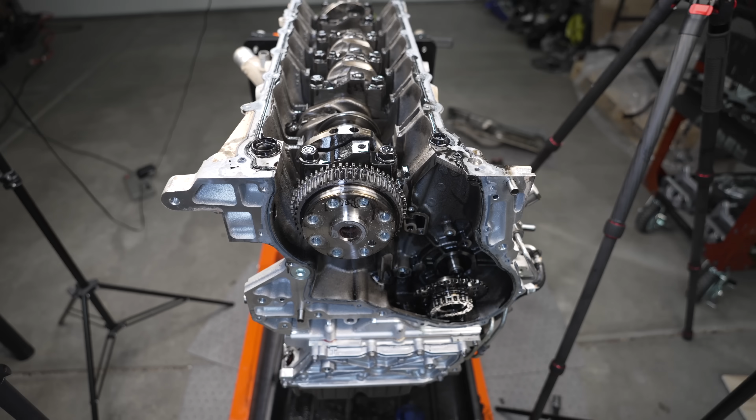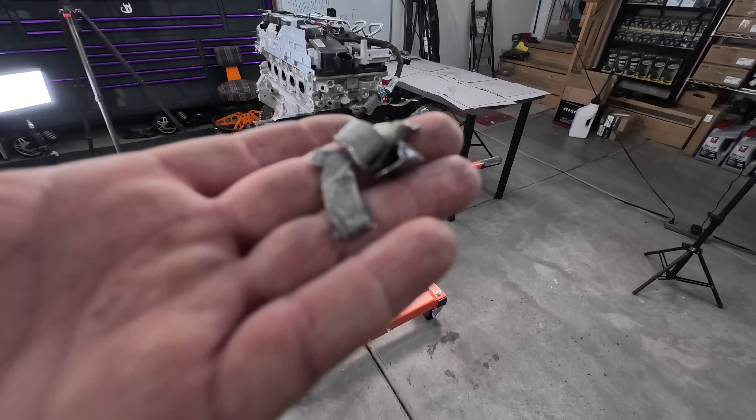Looks like we have it figured out. The LZ0 thrust bearing failure is answered. Thrust bearing failed in this LZ0 engine just over 7,500 miles. Normally when they fail, we have bearings that look like this and they're in the engine oil pan. This one was still running. We had low oil pressure. The replacement was needed because of the crankshaft end play.

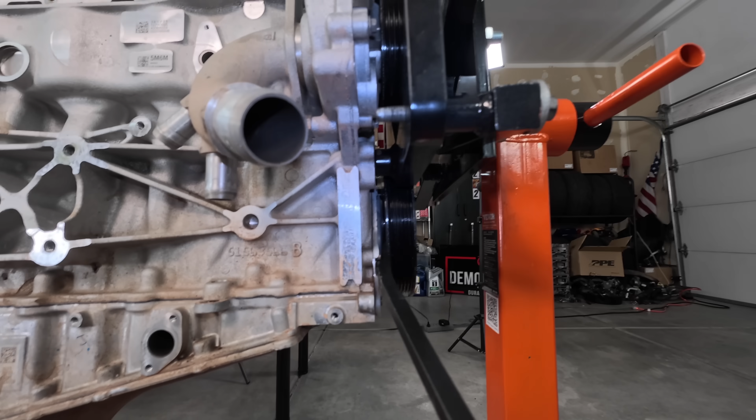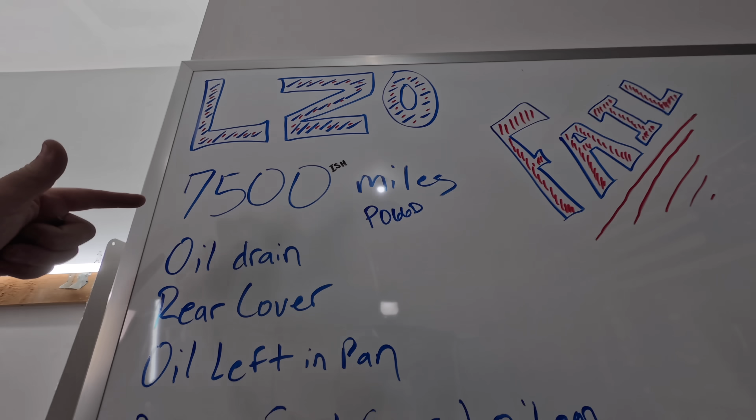Now that's a lot, but the good thing is this engine was running, which means that these bearings should not be in the engine oil pan, or there should only be one because, like I said, it was running. So here's our plan. With 7,500-ish miles on this engine, we're going to drain the oil, which we already did. The rear cover is going to be removed. We're going to go ahead and peek inside the engine oil that is left inside the oil pan because it's quite amazing how much is left in there.

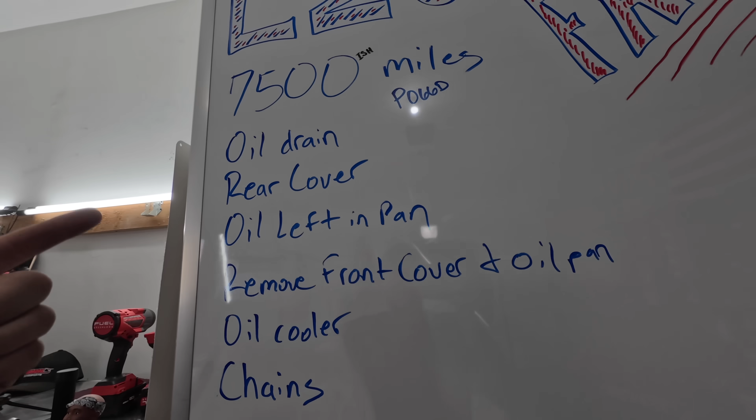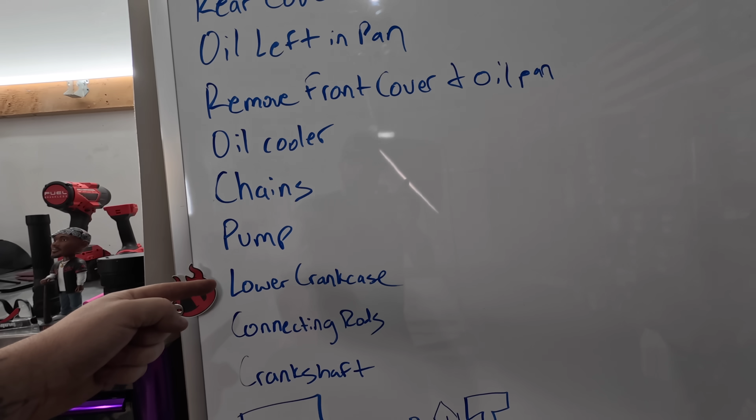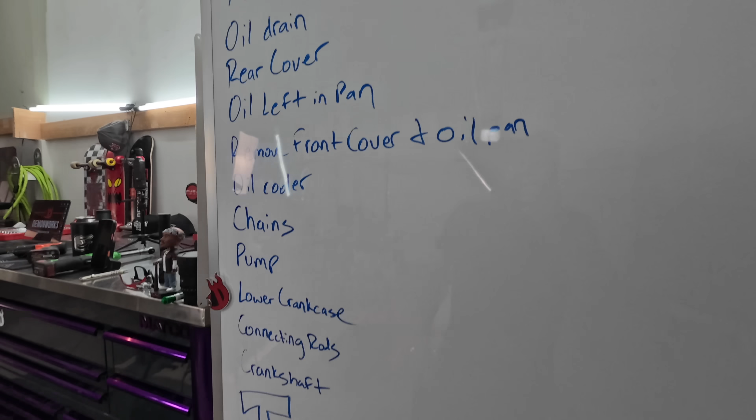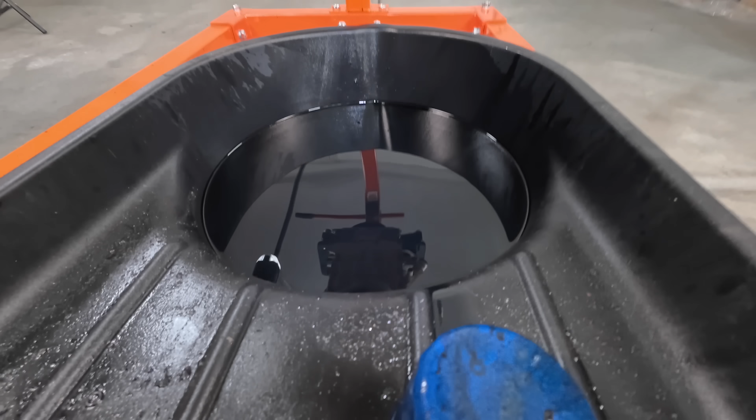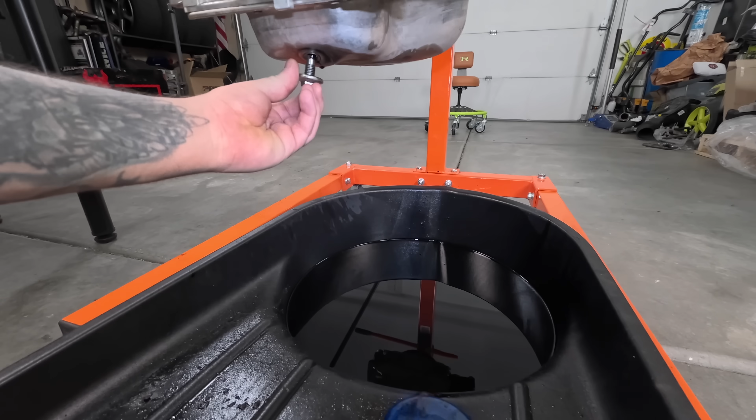I already drained the engine oil from this. There was quite a bit in there, so it definitely was not an oil consumption problem. There was no heavy sparkling or anything of the nature inside there, so we don't have a whole lot of metal debris, which is awesome because that means that this is going to be mostly intact. I'm going to put this drain plug back in. That way we can see just how much oil is left after an engine oil change.

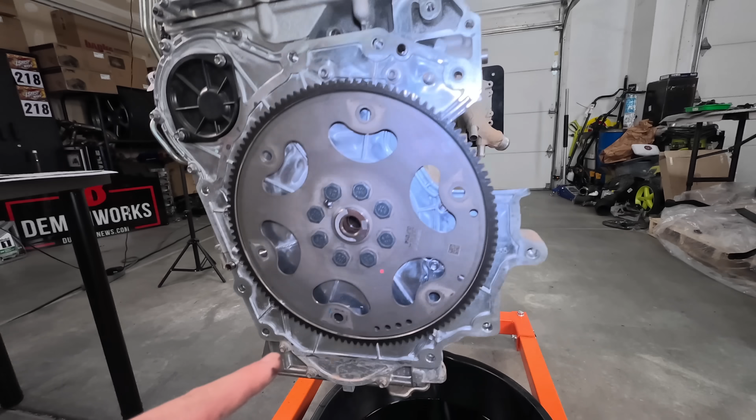And you can see the slope of the oil pan is correct. The engine is sitting level for the most part. So this is going to indicate exactly how much oil is left in there after an oil change, which is an ongoing debate online. So they did revise the engine oil pan, put the drain plug right here, and I do have a video on that.

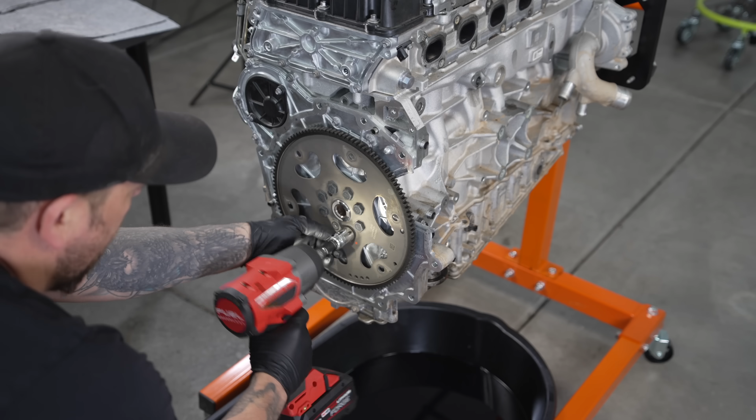With the rear cover off, we can now see the engine oil pump belt, which is the big controversy. Here it is. There's our 2026 belt. This is the one that's being used. Same as the one that was used in 2020. Here's the amount of play that we have in there. It's really not a problem. I think it's all blown out of proportion.

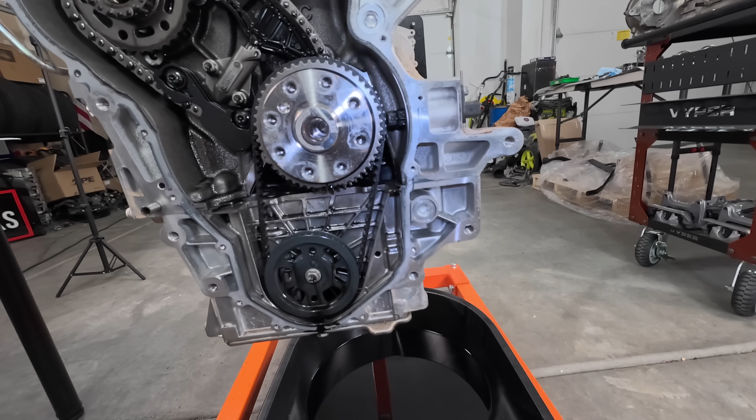But what we're going to do is remove this belt and pulley. Then we're going to be able to look inside there, I hope, and see how much oil is left in that pan. All right, let's get in there. See how much engine oil is left in that pan, which actually is a little bit more difficult to see than I expected. So let's go ahead and remove the pan. What I'll do for you is remove the pan like this, so that way we can see how much is left inside there after an oil change.

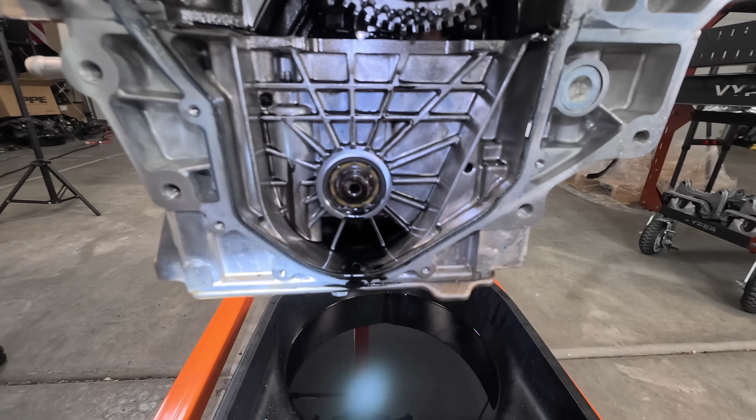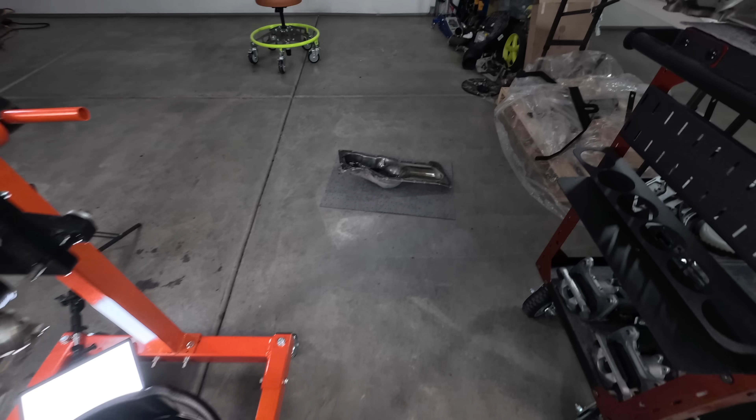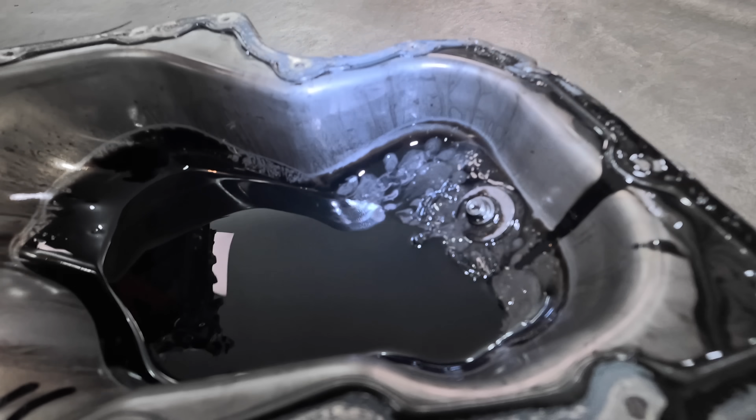Here we go. Here's the engine oil pan as just removed. We don't have a lot of debris right there. Look at how much oil is left in. This is how much is left in there after an oil change. There's a lot of old nasty oil that gets left in there. The newer pan has a better design, but that's what comes on the new replacement engines and also the 26s.

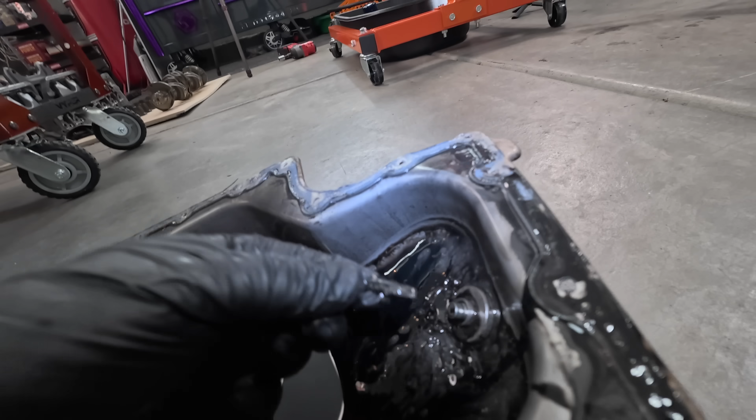But you see this? That's a thrust bearing. So it looks like we do have one thrust bearing that came apart at least. We have more. That looks like threads. All right, so that's interesting. We got more. Those are threads. Is that a bolt? This should be interesting. A lot of metal debris in here.

Here's the rest of that thrust bearing. So we have one that came apart. That is some thick, sludgy goo nastiness right there. There we go. Let's tear into this thing and see what failed.

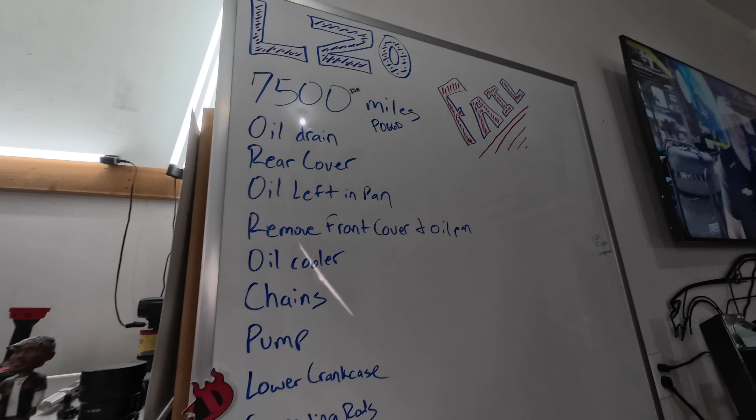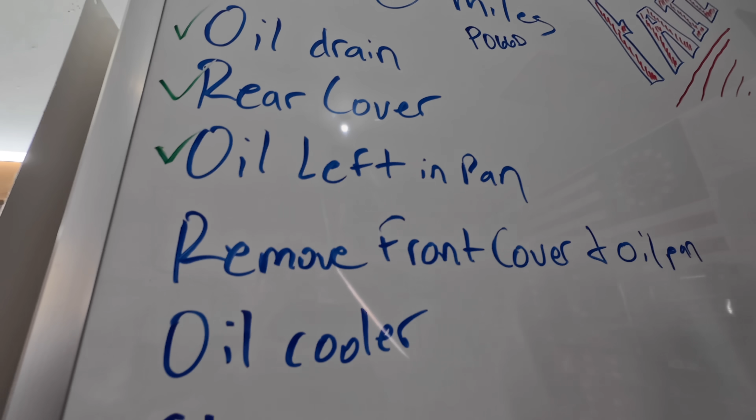It's time for a check-in. We got our oil drain taken care of. The rear cover is off. Oil left in the pan, we showed that. Remove the front cover and the oil pan. We need to remove the front cover, and then we're going to flip this over.

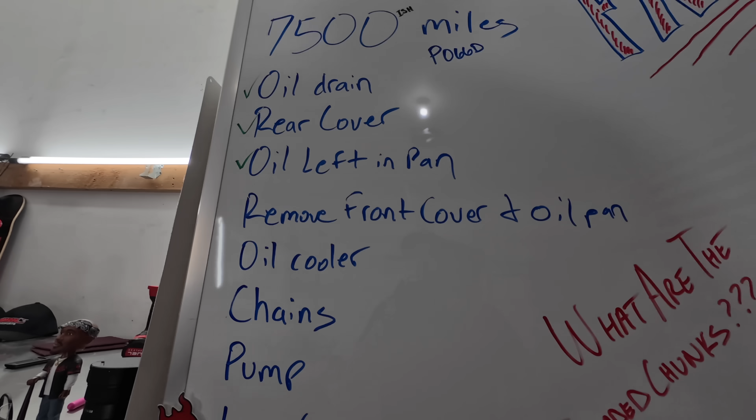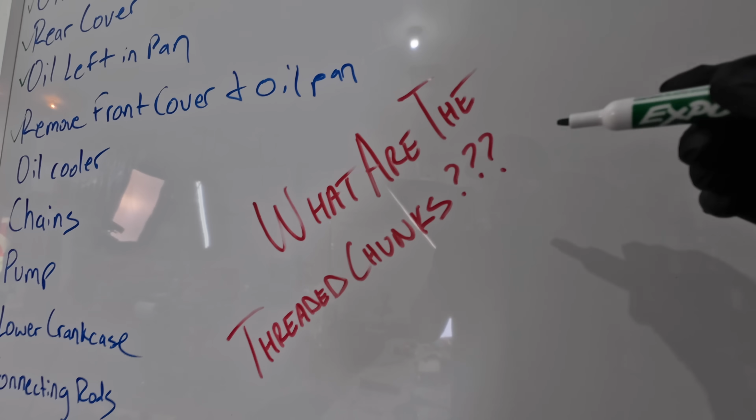All right, remove the front cover and the engine oil pan. Now remember, the engine oil pan came off. Now what are the threaded chunks? This is our new question, and I wasn't prepared to have a new question in there, but this is what we're adding in. As we tear down this engine, this should be interesting because I'm curious what those threaded chunks are. So what we're gonna go ahead and do, oh, we can cross off that right there too.

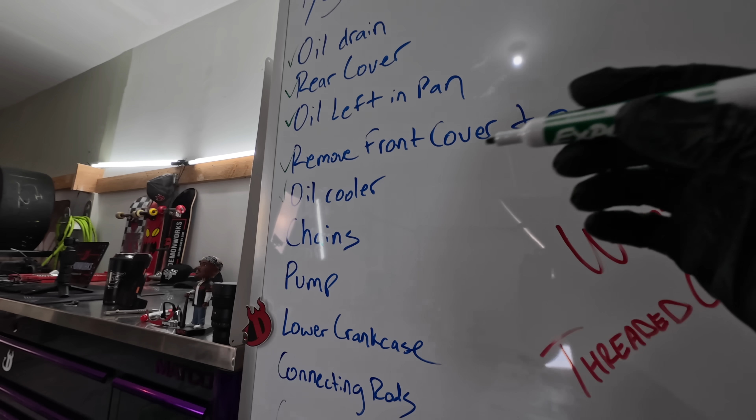Oil cooler done. Chains, we're gonna wait till we're flipped over. So let's go ahead and flip this engine over. And like I said, we did find thrust bearing. We did find threaded chunks in there. Let's see what else we got.

So what we need is for the chain to come off of the crank, so that way when we unbolt the crank, we can pull the crank up, which is not going to happen with the setup that this is. I was really hoping that I could avoid pulling.

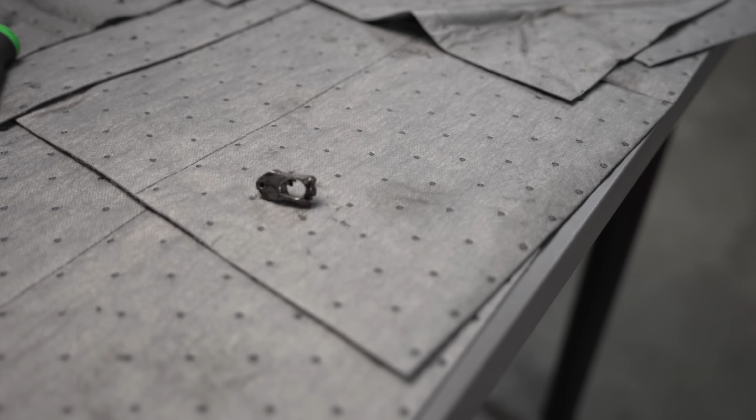Ooh, look what I found. While removing the timing chain, there was actually a piece that came out. There it is right there. What is that?

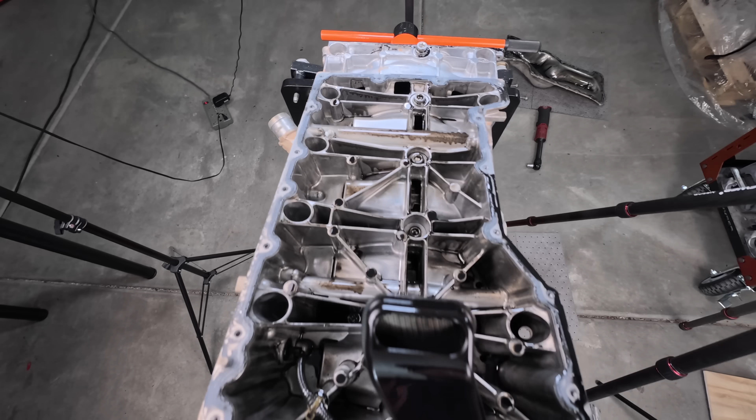There we go. We will now remove the engine oil pump, which is held on with 4 10mm bolts. We're going to go disconnect that connector right there. And then we'll remove all of the Allen bolts and some 10s that are holding this lower crankcase down. Once we take that off, we will then be able to see the crankshaft as well as the connecting rods. And that's where the real fun begins.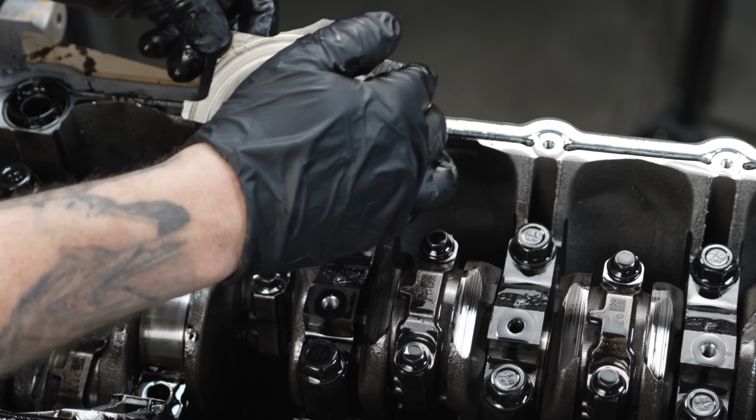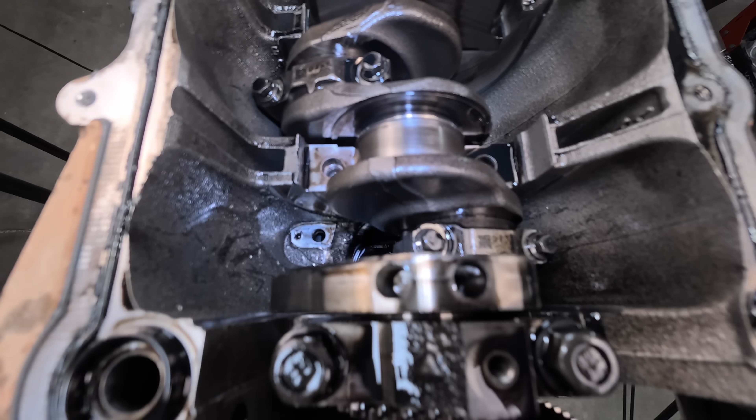All right, looks like we know which side of the bearing failed. So we've got the one on this side, on the rear of the engine is the one that actually failed. Looks like I wasted my time taking out the timing chain when we didn't even need to. All we should have done was just go straight in here, and then we would find out that it's just missing a thrust bearing. We have one more piece down there, which I will fish out in just a moment, but you could see that we're missing the piston oil squirter there.

So that means there was so much movement that it actually hit the oil squirter, broke apart. That's our loss of engine oil pressure, and that's ultimately what set the code. And there we go. So thrust bearing, I believe these are coming with one missing from the factory, potentially, allegedly. I am only finding one thrust bearing, one complete thrust bearing within the system.

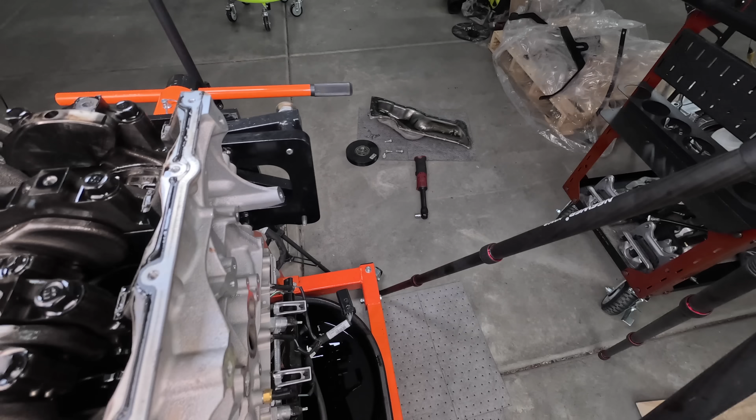There is a piece of one down there, and then we have the other little bit of debris inside the oil pan, and definitely not enough to show for 2 thrust bearings. We definitely don't have any more pieces throughout. We do have the complete underside taken apart, and we're able to see. And there are no other pieces in here.

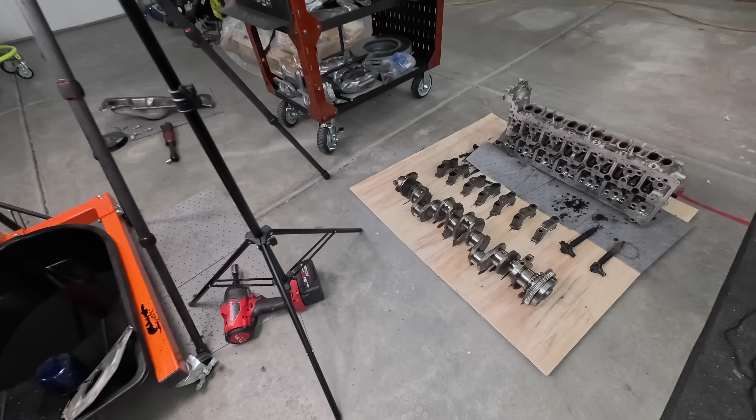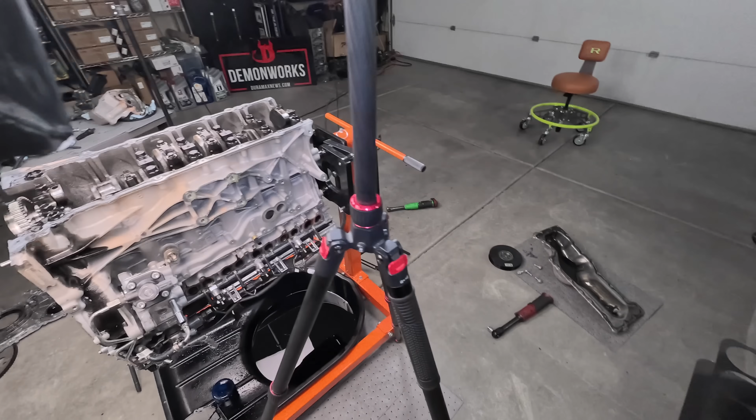Now there definitely should be more thrust bearing material, because this engine right here has 2 thrust bearings, and that's where these go, right on there. There's the surface. This is an LM2 that I'm comparing to, but thrust bearing goes on each side of the crankshaft there to control the forward and backward movement, and this one appears to be assembled with just one.

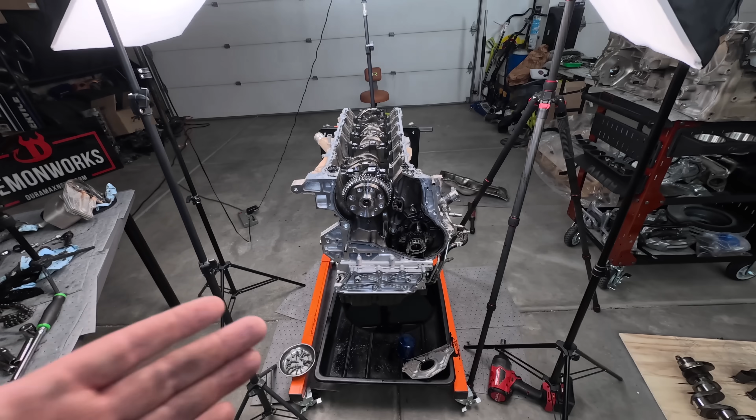Now that is fantastic news, and let me tell you why. Because if you have a brand new truck and you go for the crankshaft end play check, if it checks out good, I think it's good. You know, I think this should boost confidence, if anything, as far as that goes, because you either got one installed with 1 or you got one installed with 2. I hope I'm correct on that, because I think that will set a lot of minds at ease and potentially put this whole thing to bed.

Why this wasn't discussed earlier on prior bulletins or anything like that, it just says thrust bearing failure. I think having this information would have definitely eased some minds, but at the same time I could be incorrect. But I'm just going by what I see here, and I see the amount of debris that's inside this engine versus how much should be in there, and we're definitely missing a lot of pieces.

I know what you're thinking, and I'm thinking it too. Well, what does that bearing look like? Since we have it disassembled, let's take a closer look. There we go. Looks like we got some carnage.

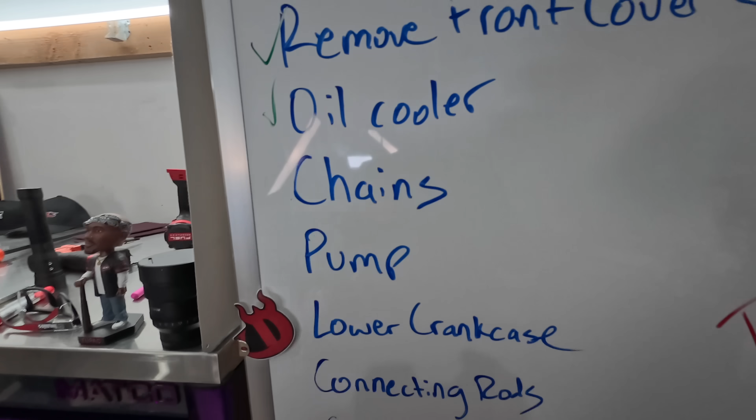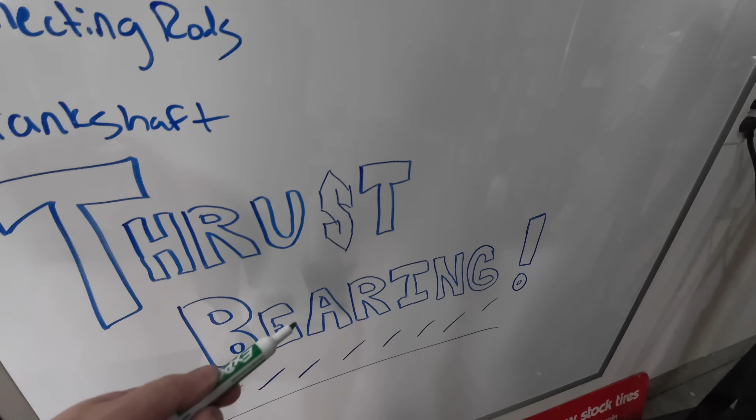All right, we got our chains taken care of. Pump is off. Lower crankcase is off. Connecting rods, we didn't need to do that. Crankshaft, we didn't even need to pull that. We got to the thrust bearing, only one. What are the threaded chunks? We got that figured out. That is our oil squirter.